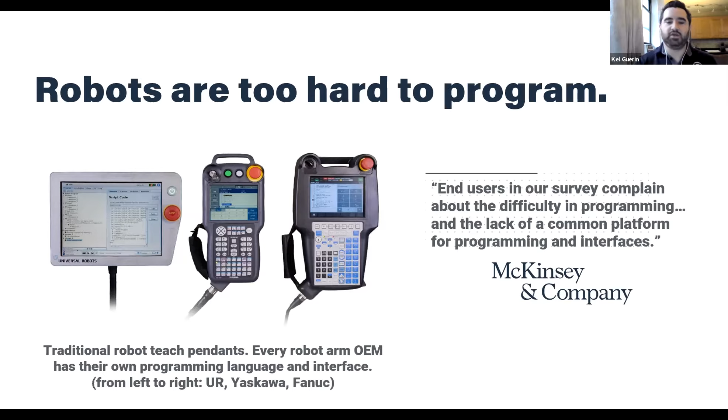That's really what we're trying to enable. We don't want to see a world where there are more robot programmers. We want to see a world where everyone can be a robot programmer, where any worker is able to very quickly, as easily as using a smartphone, pick it up and use a robot in an industrial setting, just like other tools workers can use and find value in immediately. We think the barrier to that happening in robotics is far too high.

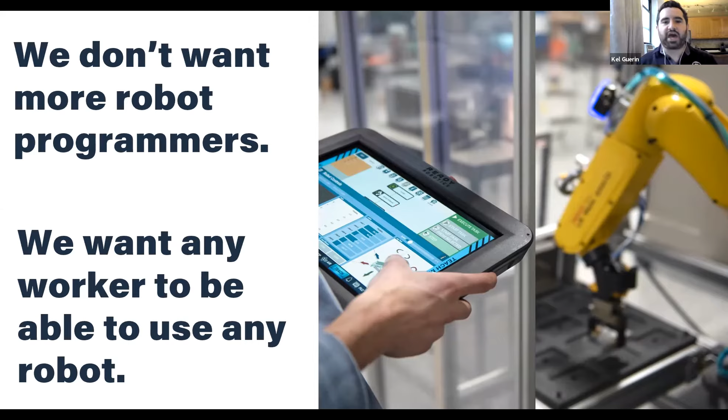So how have we solved that problem? Well, what we've built at Ready is called ForgeOS, an operating system and no-code programming interface working on a modern touchscreen teach pendant that allows anyone, and I mean anyone, to program a robot in just a few minutes, and become very competent at programming that robot in a few hours or days. It completely upends the traditional paradigm where you have to go through weeks of training to program an industrial robot. Instead, we're talking hours.

Once you learn how to use that very easy programming interface, you can see it depicted here - it's just a simple flowchart with building blocks. Each building block represents something the robot can do, whether it's move to a position, open and close its gripper, etc. Once you learn that programming interface, you can take that knowledge to any robot that ForgeOS runs on, which is a growing variety, and use that same programming skill. You don't have to learn something new going from a Fanuc to a Yaskawa to a Nachi - you can just learn one thing and use all of those different systems.

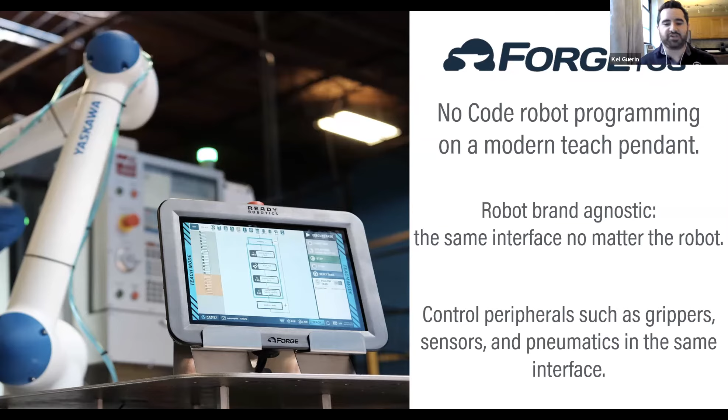The other thing you can do with ForgeOS is control any peripheral. As anyone familiar with robotics knows, the robot is a cool tool, but it needs a lot of other hardware and devices to actually practically do a task. ForgeOS allows you to control all of the other peripheral sensors and pneumatics necessary to get the robot to do its job.

So not only does ForgeOS enable you to pick the right robot for the right application - there are many robot brands out there, each with their specific capabilities, some better at certain applications than others - it's really been the case that companies have had to pick and choose based on their investment in training for a specific brand. They haven't been able to look at the latest technology from a different brand because they're already so invested in the current brand they've learned to use. So this is just a smattering of the robot companies out there, and ForgeOS's ultimate goal is to support all of them, or a large number of them, by the end of the year.

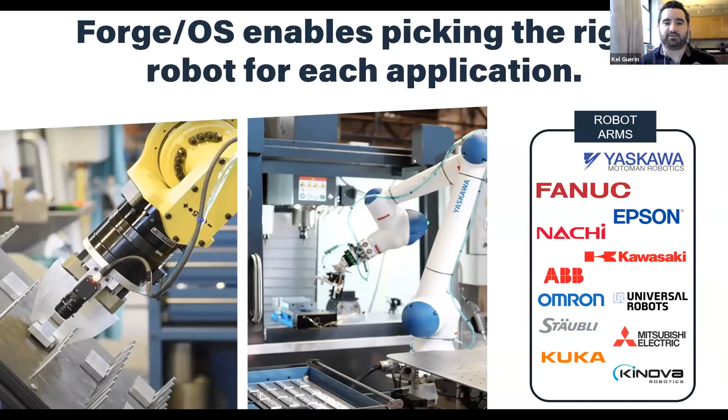The other thing it allows you to do is pick the right peripherals for each application. The effort it takes to use a peripheral with a robot and program whatever driver is necessary is a lot of effort on top of just programming the robot. So ForgeOS makes it easy to pick not only the right robot for the job, but the right tool for the job. This is just some of the many peripherals we support with our software.

So where have we seen companies succeed with this technology? Well, in a lot of different places, from small manufacturers all the way up to large enterprises, in a variety of different industries: aerospace, automotive, boat, trucking, medical devices, etc.

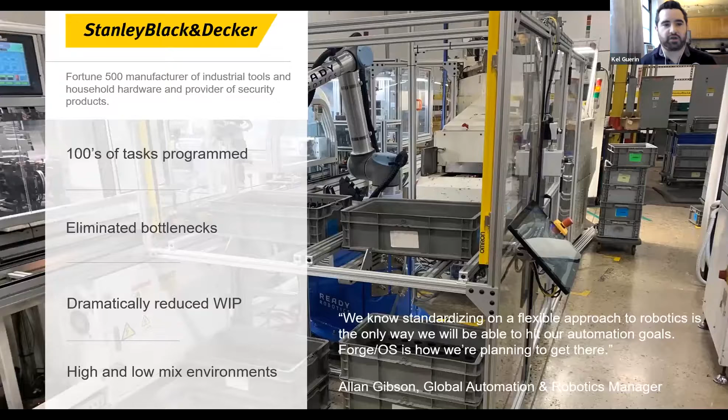One of our larger customers, Stanley Black & Decker, was able to deploy a huge number of robots that they previously couldn't, because they didn't have the skilled expertise in-house. That easy programming let them upskill their people rapidly and program hundreds of tasks since they started using our software. This also eliminates a lot of bottlenecks, because they might want to put a robot in place and can't, losing money because they don't have enough capacity and need automation to get that capacity up.

And any reprogramming necessary if a line goes down, which happens in manufacturing, takes a long time if you don't have people skilled at working with this hardware. Making the robot easier to work with means fixing any issue becomes much, much faster.

To go to the other end of the spectrum, Alicat Scientific is a very small manufacturer, but important in that they're one of the leaders in flow controllers for ventilators, which became a huge importance in March with the rise of COVID. They were in a similar position where they were bottlenecked, trying to create these flow controllers, and really needed something to unlock that bottleneck.

With our software, they were able to deploy a robot in 3 days, which if you have any experience in robotics, is incredible—we're talking weeks to months for most robotic systems. In 3 days they had the robot running, and within 10 days they were able to run it lights out, meaning overnight without anyone there at the factory to monitor it, which is another significant milestone.

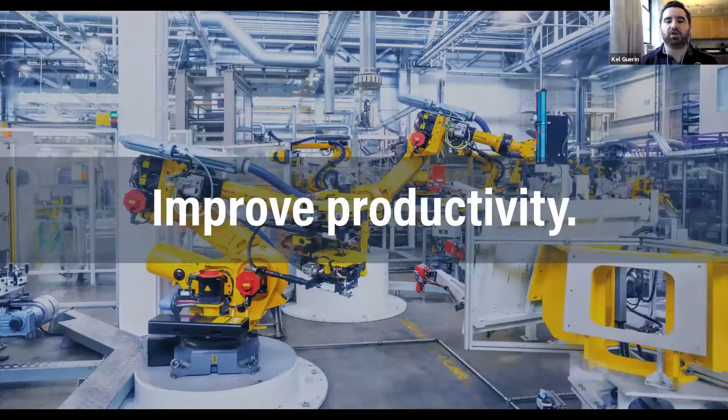It also allows operators who are already at these manufacturers to very easily upskill, right now for free, because they can go online and take these courses. It's roughly 40 hours of content that covers all aspects of the robot and how to use it for real tasks. Right now the task is machine tending, but it's everything — including how to fixture your parts, how to put parts into the machine, work holding grippers, all of that stuff you need to actually do the task. It just allows you to improve the productivity of your people.

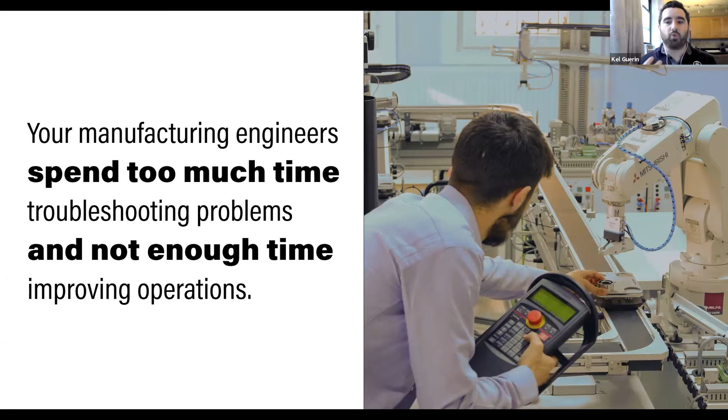What we're seeing is people spending too much time troubleshooting problems and not enough time improving operations — very talented people. By making this technology easier, more people are able to use it, it's more accessible, and overall we see a shift in manufacturing where value is created more and more by people. Right now we spend a huge amount of time programming and troubleshooting and very little time identifying improvements, being agile, thinking in a Kaizen manner where we want to improve but can't because we're troubleshooting. We see that shifting — because the software is so much easier to use, you're spending the majority of your time doing value-adding things: identifying operations, improving efficiency, creating new processes, and less time programming and fixing robots. That's very much what we're about at Ready.

We think the power of usability, and the focus on a piece of software that anyone can easily use that then works on any robot, has a huge transformative power in the industry because it really unlocks people's ability to use and get value from industrial robots.

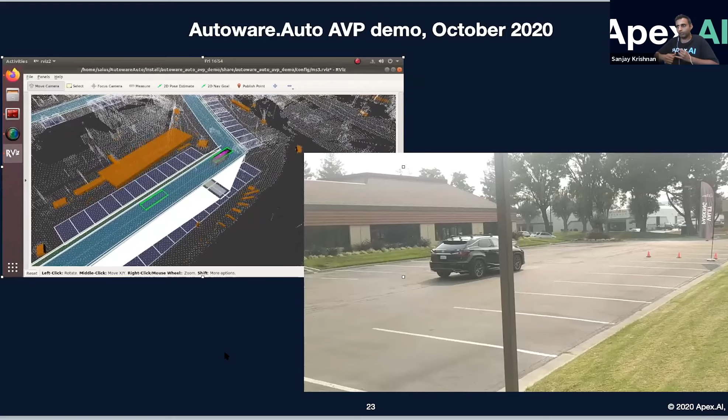A very short couple of videos that I wanted to show again on this thing. This video is, by the way, just a couple of weeks old, showing this car in simulation on the left-hand side, where you can actually look at the path planning algorithm do its forward planning in terms of LiDAR-based scene recognition. And by the way, the mapping that you see of the parking lot where we actually demonstrated autonomous parking is all based on a 3D point cloud that has been pre-mapped onto this thing.

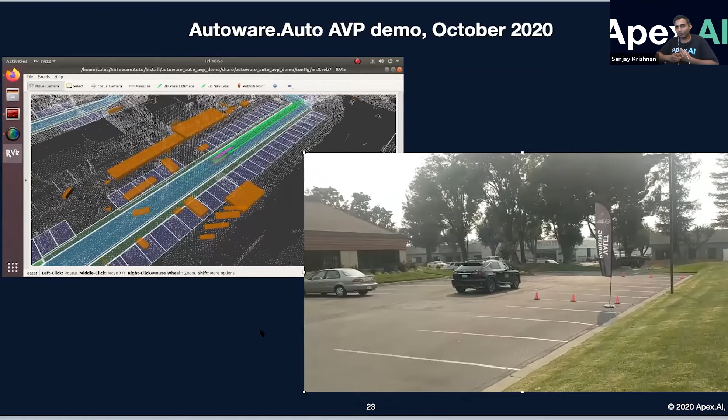So I want to switch quickly to the actual demo video that we hadn't seen before. The video here is actually showing the car running, following the same path planning algorithm. By the way, this car, from a software point of view, is running the full open source software stack that I just showed you. The car itself belongs to Apex AI, and we've been using this car for a few demos such as this.

And you can see the parking planner that was contributed by Embotech, the simulation contributed by LGSVL, many of the components of the LiDAR processing actually contributed by Apex AI, and there'll be a lot more detail on the Apex AI website and the Autoware.Auto website that tells you various other components of contribution that have already landed and are still continuing as we go into other areas of autonomous driving.

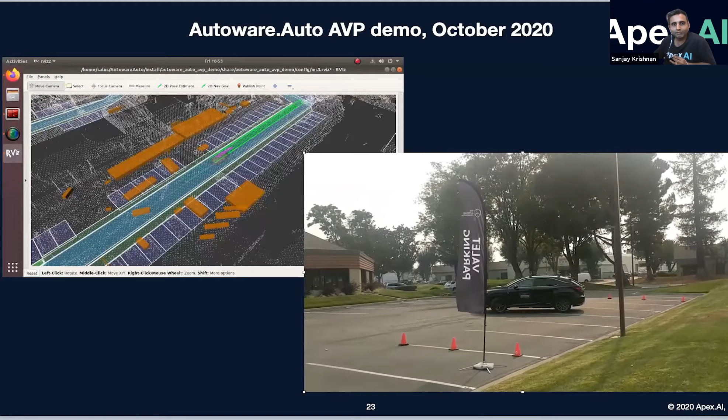All right, to wrap it up, I think my conclusion is that Apex OS enables a path to production based on open source, and we actually enable several different types of autonomous systems, several different types of applications, and a complete developer environment that includes not only the operating system, but all kinds of support that you expect from a professional development environment. Thank you.

Thank you so much, Sanjay. And I'm going to go ahead and start introducing our final speaker from SMP Robotics, Tal Turner. He's Vice President of Business Development and Partnerships. Tal brings a decade of outstanding experience in the autonomous security robotics field. In his recent roles, he's served as Global Business Development Leader of Nightingale Security, T-Mobile, Keynote Systems, Cotendo, which was sold to Akamai, and CEO of Tal Turner Consulting. He plans to speak about SMP Robotics and its advanced autonomous solution that is revolutionizing the security landscape. And Tal, if you'd like to go ahead and pull your screen up.

Sure. Thank you, Kevin. Very gracious. I'm going to have Phil Karlan, my partner here in Anaheim, California, support me because I'm on double conference calls at this point. But I will give the introduction and let Phil take over.

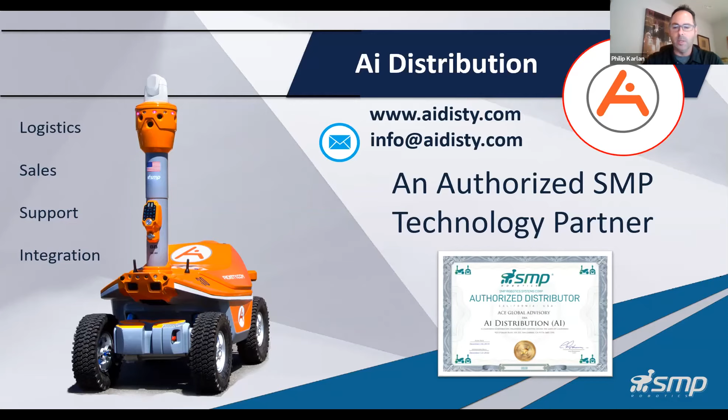SMP Robotics, hands down, are the best security robots in the industry. They're fully autonomous. They are rugged. They can run and operate at high temperatures and cold temperatures. They can climb 45-degree hills, and they can, for example, live at electrical substations year-round because of the automated charging system capability. So I'll just touch base a little bit about the robot and the capability.

So the SMP robot is now a third generation. It's the S5-2. We also have an S3-2, which is designed specifically for substation and thermal inspections. There's also a number of different sensors that can be added to the robots. But going from the top down, it's got a 360 PTZ IR camera that rotates 360 degrees. It's fully ONVIF compatible for all security operation centers. It has 6 HD cameras on board. It has a two-way microphone, which is a great feature.

Like I mentioned earlier, it has an automated charging station. That capability sets it apart from most of the other autonomous robots out there. The other robots tend to have to be either plugged in, or when they charge, they have to charge for a long period of time, whereas the SMP robot can charge for about 2 hours and run from 8 to 12 hours. And once you add a second robot, you have 24-hour continuous patrolling, usually in restricted areas, or it could be an added solution at a big facility gate, for example.

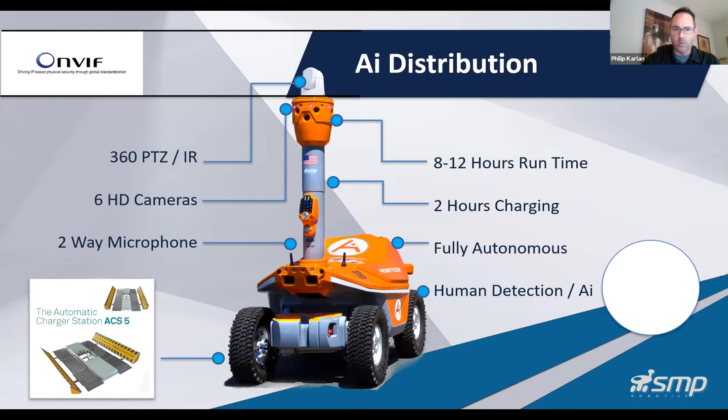We are working with existing security operations. So we're seeing customers saving at least 50% or more on security contracts. So they're realizing an immediate return on investment by adding security robotics into their security operations. That's pretty much what the SMP robot is and what it's about. And I think right now is probably a good time to show the short video so you can actually see the product demonstration.

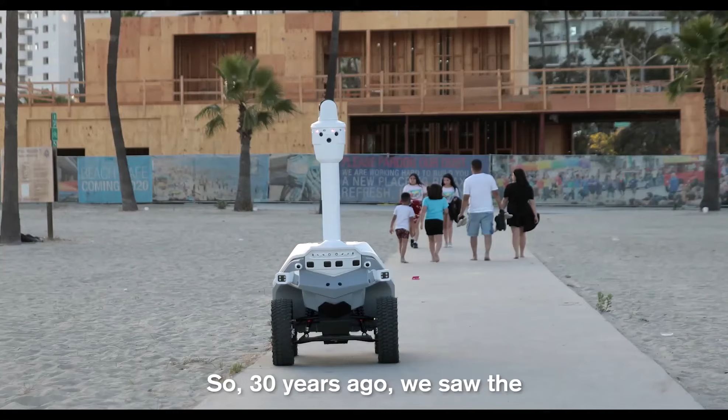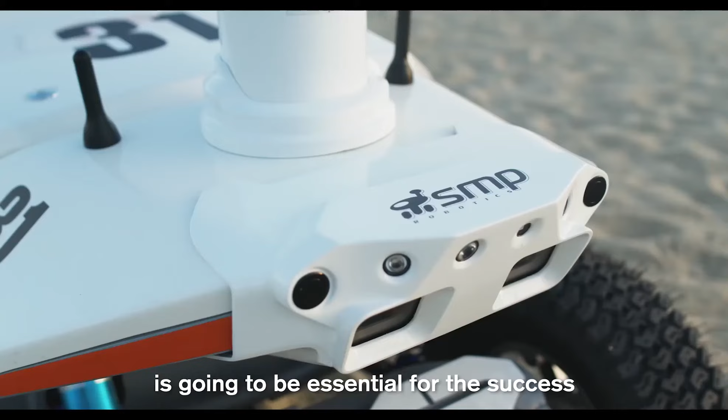What I want to talk today about is how technology and robotics is changing the security landscape. So 30 years ago, we saw the advancement of surveillance and security cameras. Today, we are seeing the next generation of technology for security is now here. So what does that mean? It means that the technology using security robotics is going to be essential for the success of any business here in the United States.

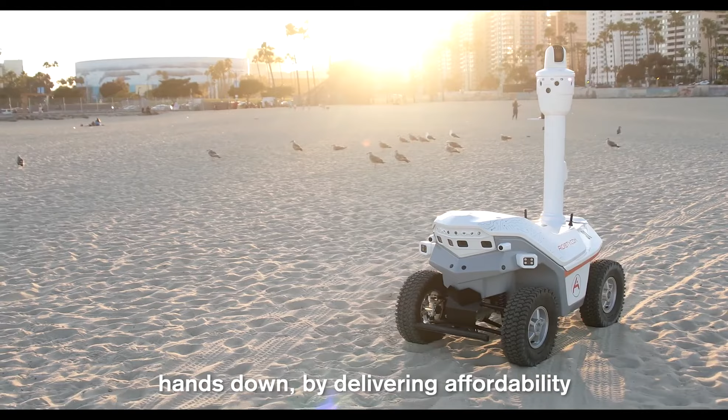After extensive research, our team identified that SMP Robotics clearly is the best solution provider for autonomous security robots, hands down, by delivering affordability, reliability, and dependability. So what does it mean for our customers? Well, it's very simple. We're going to offer an additional layer of security with better return on investment, improved security operations, and scalability. So how do you get started?

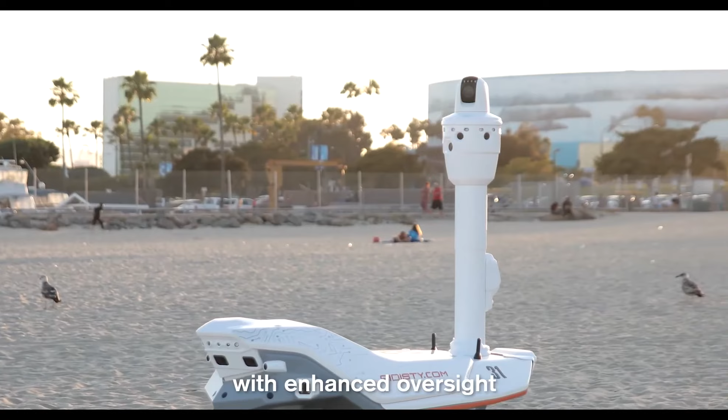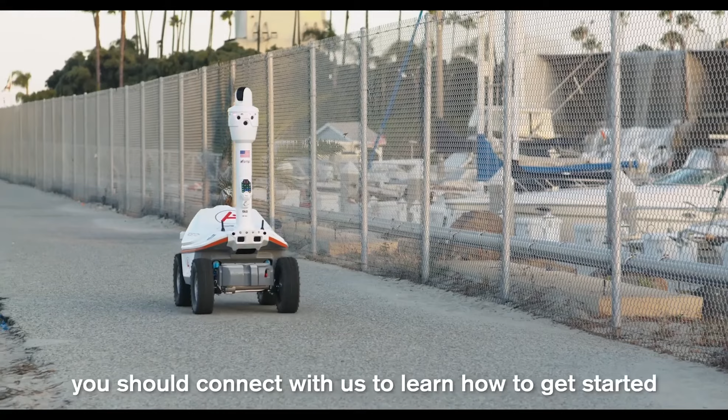What we're seeing with our existing customers is an immediate improvement in security operations with enhanced oversight and reduced operational expenses. So if you're a security provider experiencing challenges in the areas of guards calling out, no-shows, or any underperformance, you should connect with us to learn how to get started. Today our customers are saving over 50% by using autonomous security robots.

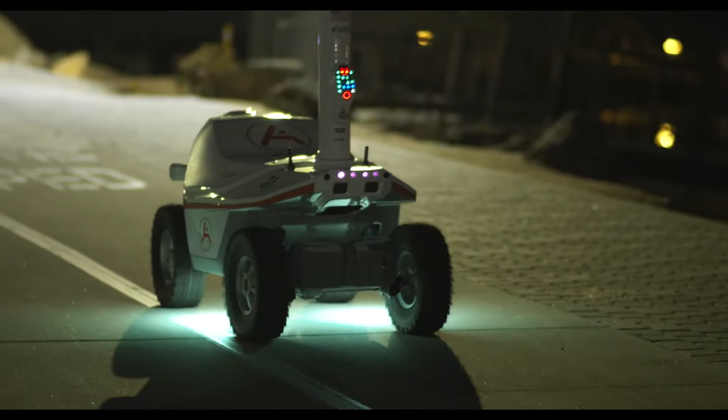Phil, do you want to give some final comments? I think that kind of summarizes it.